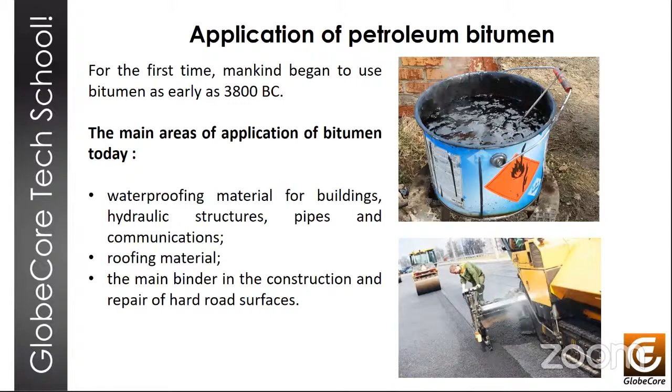Right, so under normal conditions, at normal room temperature, bitumen is a solid or very highly viscous material. It is not very usable for any application. So to use it, we must make it liquid. And we can do this in one of three ways. We might heat it to some 100, 200 degrees Celsius until it turns sufficiently liquid, and then we can apply and mix it as we wish.

Asphalt concrete mixtures prepared with this hot bitumen, as a rule, are stored, transported, and applied hot, probably with the exception of cold stored bitumen mineral mixtures, which are prepared with heating, but still stored and applied cold. We can dilute bitumen with refined oil products, such as various solvents, kerosene, diesel fuel, gasoline, etc. And that makes this bitumen or asphalt liquid.

And the third way, and the one we will be focusing on today, is emulsification. We mix bitumen with water, adding in a surfactant, also known as emulsifier. And as a result of this emulsification, we get a bitumen emulsion, which is still liquid even at ordinary room temperatures.

So when paving roads using hot and warm asphalt concrete mixtures that are prepared with hot bitumen, and that would include crushed stone mastic mixtures or hot compacted or cast mixtures, the road surface hardens and gains strength as the applied mixture cools down. And this method has both advantages and limitations. The advantages include the possibility of making asphalt concrete with high strength when using high viscosity bitumen for roads with heavy traffic.

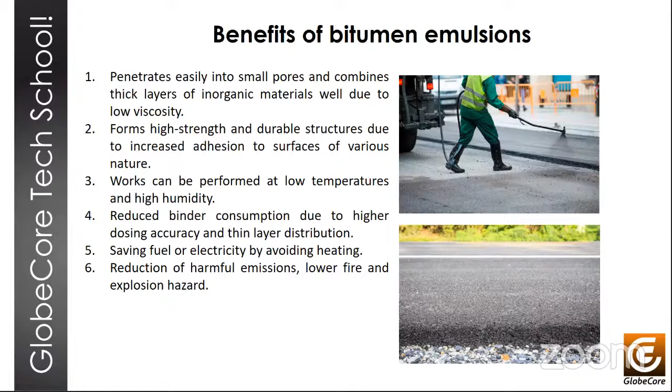So what is an emulsion? It's a dark brown liquid. It's made by dispersing bitumen droplets, particles, in water. And this dispersion is counteracted by the internal cohesion and viscosity of bitumen and by the surface tension forces, interfacial tension, which resists the formation of this new interface. While we keep mixing this mixture, it's okay. But once we stop, if we don't add special chemicals, the emulsion just breaks down into water and bitumen really quickly. So to keep the components mixed, we use a surfactant, and that surfactant prevents or slows down the separation of the phases of the emulsion.

And the way it works is the emulsifier molecule is polar. One end is compatible with bitumen particles, and the other part of the molecule is repelled by other molecules of the same emulsifier. So bitumen particles are surrounded by a force field of a kind, and they don't stick together and stay apart in the emulsion. Next slide, please.

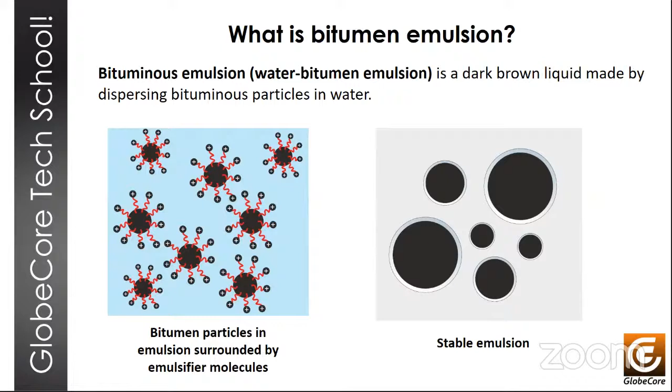Also, apart from bitumen, water, and a surfactant, emulsion contains a stabilizer. It can contain acid, various solvents, and thinners. Acid is necessary to improve the stability of the emulsion. In most cases, we'd use hydrochloric acid, orthophosphoric acid, and acetic acid. For anionic emulsions, however, we use alkalis. So same function, but different pH. Okay.

Stabilizers are used to reduce the changes in the physical and chemical properties of the emulsion during storage and use. That would be maybe calcium chloride solution, very weak, 0.05 to 0.1%. Solvents are used to create a more homogeneous system, and they are light oil fractions with a boiling point of about 140 C in the amount of maybe 0.5 to 3% of weight. And we also can use thinners, and these include various gas oils, oil fractions, etc. And there is a wide range of those.

We can use anywhere from 5 to 30% by weight. What they do is they increase the penetration of bitumen to the required parameter, to the required value. So we have a stable liquid emulsion in the end. Also very important, adhesive additives. They improve, as the name implies, the adhesive properties of the emulsion.

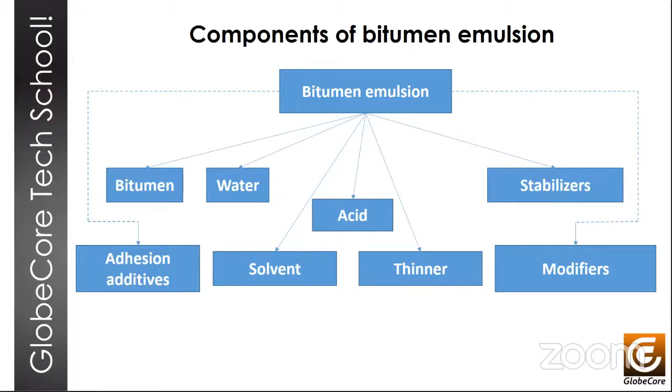So now that we have talked about what the emulsion is, let's talk about the classes of the emulsion. And depending on the type, we can have direct emulsions, and these are oil in water emulsions. There is the inverted type of emulsion, a water in oil emulsion. That's when water is the dispersed phase and is dispersed in bitumen, which becomes the dispersion medium.

And it should be noted that during the production process, both types of emulsions can be formed simultaneously, especially if we use double-purpose surfactants. And what type of emulsion will eventually turn out depends on the nature of the bitumen, the pH of the water medium, and the ratio of the volumes of the phases.

So in order for the surfactant to function as such at the oil-water interface, so to be adsorbed, we must have an affinity of the same order for both phases. And if this condition is not met, the emulsifier will move from the interface to the phase for which its affinity is greater. And typical examples of such well-balanced substances are some soaps, and their molecules have an organic tail with a strong affinity for oil and an ionized head with a significant affinity for water.

With very short tails, the affinity for water predominates and the molecule is absorbed into the water, which makes the emulsifier poorly balanced. With very long tails, the affinity for oil dominates, and the emulsifier again is poorly balanced. But with a certain average ratio of the lengths of the head and tail, there is an optimal balance and the best stabilizing effect that can be achieved.

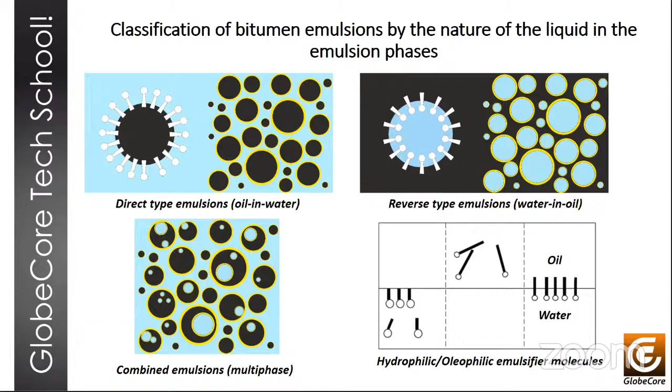So here's how emulsions are classified depending on the concentration of bitumen. Basically, low concentration emulsions contain up to 40% of bitumen, concentrated contain up to 74% bitumen, and highly concentrated go above 74% of bitumen. And currently, it's safe to say that only the first two types are used in road construction. Highly concentrated emulsions are used extremely rarely and are currently practically not produced.

But there is some promise in them for this production, primarily where it's necessary to transport emulsions over long distances. So there are benefits to that. Next slide, please.

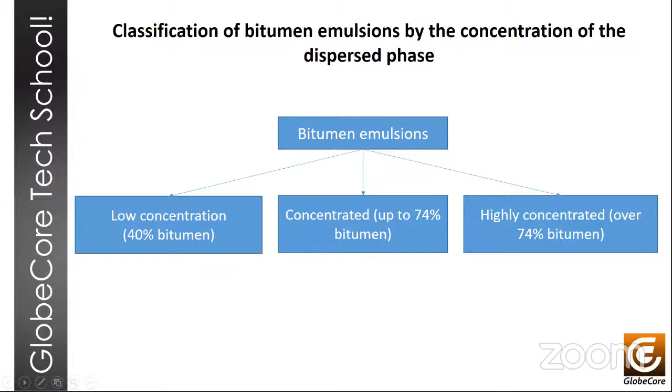And there are classes of emulsions depending on the emulsifier. So this can be anionic with the anionic surfactant, or cationic, with cationic surfactants used for those. There are amphoteric emulsions with double-purpose emulsifiers, compounds that ionize and act differently in water solutions depending on the pH of the medium. They exhibit the properties of cationic surfactants in acidic solutions and anionic surfactants in alkaline solutions. Then there are non-ionic ones that have surface active properties but don't dissociate into ions in water solutions.

And there are emulsions with solid emulsifiers. Okay, so emulsions of the inverse type, depending on the nature of the emulsifiers, are usually not separated into classes traditionally, but now when it became possible to have a large selection of emulsifiers, we can divide them into some subcategories. There are surfactant emulsions, solid emulsifier emulsions, and emulsions based on non-ionic emulsifiers.

And this type of inverse emulsion is still under development, but again, has its promises, especially in the case of using an emulsifier that's sensitive to temperature changes during the preparation or application of such emulsion. Next slide, please.

Okay, so in road construction practice, the most common emulsions are of direct type. They are primarily anionic or cationic class. Therefore, the classification of these emulsions in the United States is based on the rate of mixture formation, of setting based on this emulsion, and the rate of breaking of the emulsion. So how soon the bitumen is released from the emulsion and achieves its original properties and forms a continuous film. And there are rapid set emulsions, medium set, slow set, and quick set emulsions.

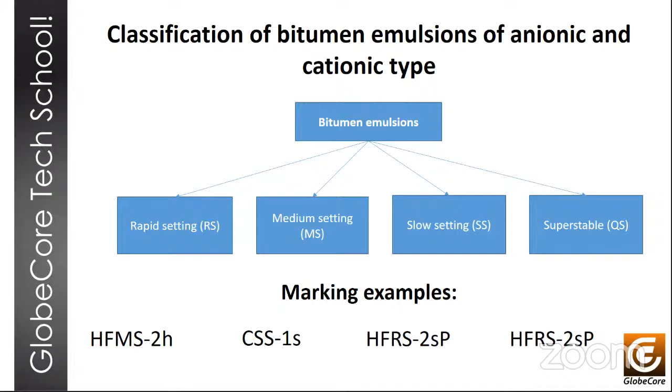So bitumen emulsions pretty much perform two main functions. The binding function is the use of an emulsion to bind mineral materials and their particles together, which is a prerequisite for the production of asphalt mixtures, such as emulsion mineral or black crushed stone or cold mixes and what have you. The protective function is to protect materials and surfaces against the effects of aggressive media or the elements, so, water, salts, etc.

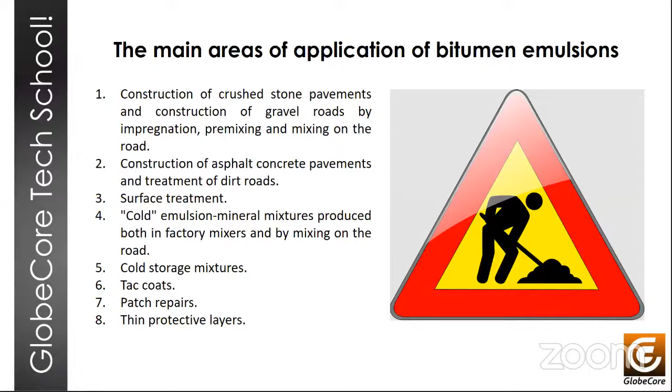Bitumen emulsions can also be used for quite a wide range of road construction works. They can be used for surface treatment, for cold storage mixes, for creation of traction layers, tack layers, pothole repairs, and thin film protective layers, etc. Okay. Next slide, please.

So first, let's briefly touch on the subject of primer coats. Priming means the application of an emulsion by spraying it in the form of a thin layer, which ensures reliable adhesion of the asphalt mixture to the underlying base. For most types of pavement, be it concrete or anything else, the creation of a binding layer is not just desirable, it's also necessary.

So one of the types of priming is the application of the so-called initial coating, when a slow emulsion with a bitumen content of 55 to 60% is sprayed onto a granular base to prepare it for the application of an asphalt concrete mix. Next slide, please.

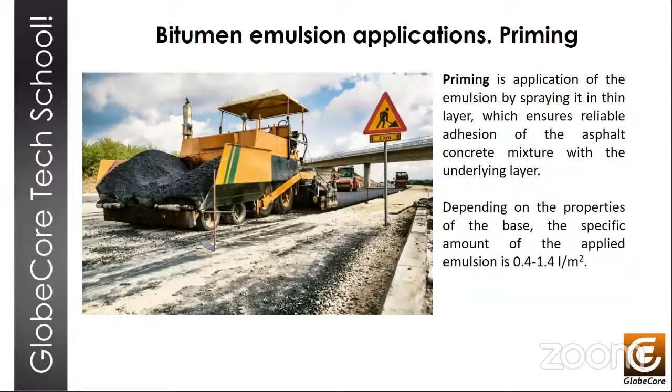Surface treatment is performed on new asphalt concrete and various types of black and cement concrete pavements, as well as on used pavements, to ensure the necessary adhesion and traction between the wheels of vehicles and the pavement surface, and also to increase the service life of the pavement. So the layer created by surface treatment serves to give the coating certain roughness and water resistance, wear resistance and strength as well, and density.

So we're talking here about both an inexpensive single treatment of secondary road surface and the creation of wear resistant surfaces on large major roads with relatively high traffic loads. And it's important to know the strength of the base is important to the durability of the surface that we treat. Okay. Next slide, please.

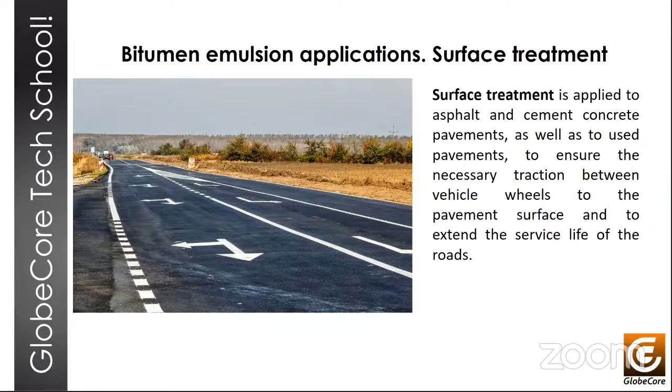Okay, there's crushed stone impregnation. That means the construction of layers, bases, and coatings and pavements by multiple scattering of crushed stone of various fractions, compaction of that stone material, and its permeation with emulsion. Usually done twice, with slow breaking emulsion that contains 50 to 65% bitumen on average.

There is the patch repairs, and the use of bitumen emulsion does greatly simplify the repair process, and it allows operations to continue well into late autumn and start early in spring with air temperatures just 5 degrees above 0 Celsius. So when using emulsions, it's possible to apply them on wet materials because cationic bitumen emulsions ensure pretty fast formation of a binder film and high adhesion of this film to the surface of most aggregates, even wet, and generally rather good quality of the repair works. Next slide, please.

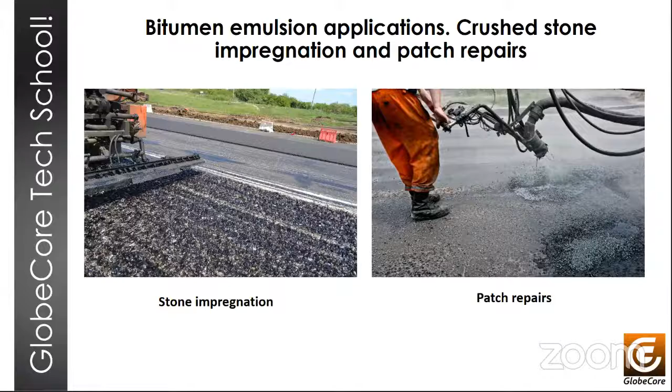And there are other technologies as well. There's slurry seal, microsurfacing, Multimac, and cold recycling. Slurry seal is a method of applying thin layers over existing pavement. This cold mixture consists of dense mineral material with a filler, usually Portland cement. It's mixed to a uniform consistency with bitumen emulsion and water. And after the so-called setting time, the surface becomes impermeable to water.

The coefficient of friction is improved for vehicles, and the old coating is protected from water, oxidation, and further breakup. And with the help of slurry seal, rutting and longitudinal deformations of the profile can be compensated to a degree. Since there are practically no voids in this hardened mass, it resists squeezing very well under vehicle wheels. And after coating is complete, traffic can resume after about 1 to 4 hours. Okay.

Microsurfacing emerged as a further development of the slurry seal method. It's a method of creating a rather thick and durable coating for the surface. Microsurfacing can be applied in 2 layers of 25 to 30 millimeters in thickness, and in some cases, the total thickness actually reaches 75 millimeters. With this technology, larger stone material is used, and it's bound even more strongly than in slurry seal. The coating can withstand significant physical loads without deformation. And to further increase the shear stability, latex is used in this process. Next slide, please.

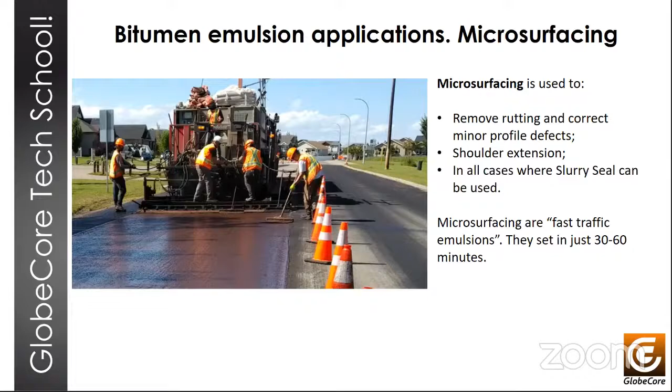All right. Multimac. It's a thin layer coating that has the function of a protective layer or layers. It cements the damaged base, fills all cracks and voids with a bitumen mineral mixture, and it evens out any deformations in the pavement. This mixture is prepared and distributed by a special machine that is equipped with a very precise digital computerized system for portioning of components. Multimac does not require any special sealing, so traffic is possible within 20 or 40 minutes after the work is done.

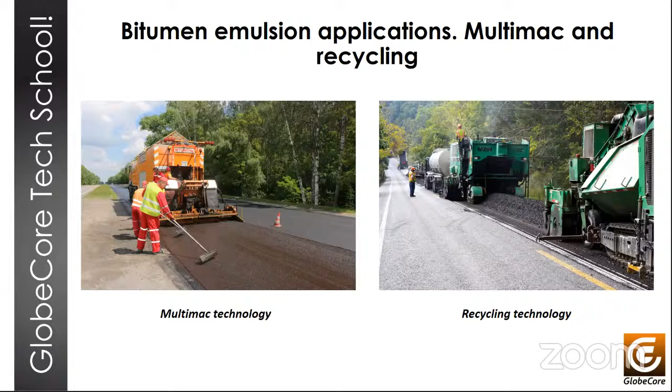Recycling, or cold recycling, is a technology of strengthening soils, stone materials, and asphalt granulates that are obtained as a result of crushing asphalt scrap, with various binders, by cutting and mixing it directly on the road. Next slide, please.

Right, so sealing cracks in the pavement can also be done using bitumen emulsions. The cracks are filled with an emulsion mixed with fine-grained sand, leaving a few millimeters to the surface. And after solidification, the remaining volume is filled in with straight unmixed emulsion without the sand. And then sand is applied over the top of that to protect this material from being carried away by vehicles

and wheels. And bitumen emulsion can also be used to reinforce slopes, reinforce sandy surfaces to prevent dust formation, and remove dust from unreinforced materials and dirt roads. And in many cases, emulsions can also be used for waterproofing. Okay. Next slide, please.

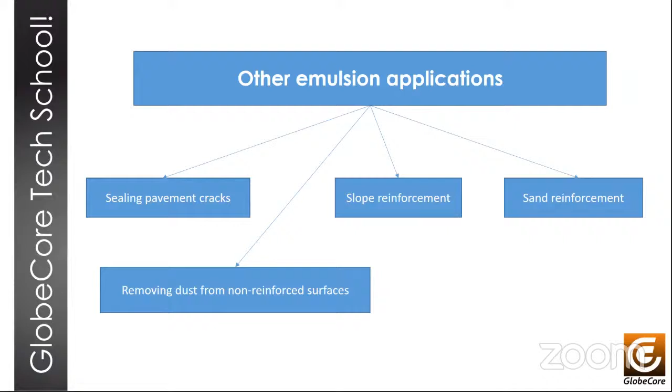So now that we know that emulsions are good, let's talk about how to make them. Bitumen emulsions are usually made using a colloid mill, but they can also be prepared using other dispersing devices. In a mill, an emulsion is produced by passing a mixture of hot bitumen and a water phase, a solution, between a rotor and a stator of the mill. The rotor and the stator both have slots or teeth that create a very turbulent flow and very high shear forces. And for the preparation of bitumen emulsion, either batch or continuous production plants can be used.

Batch production process consists of 2 stages. The first would be the preparation of what we call a water phase, also known as soap phase sometimes, and the actual production of emulsion. The water phase is prepared in a tank with heated water, emulsifier, acid or alkali, and other additives. And the solution is mixed. And then at the stage of actual emulsion production, bitumen and this water phase are mixed in a colloid mill

in a certain proportion. So if we need to add a solvent to the mix, then we need a bitumen portioning tank. But the solvent can be dosed and injected into the bitumen stream directly and continuously as well. So in a batch unit, there are only a few material streams involved in the actual production process, which allows manual control. And the exact dosage of the various components plays a very important role in ensuring the quality of this emulsion.

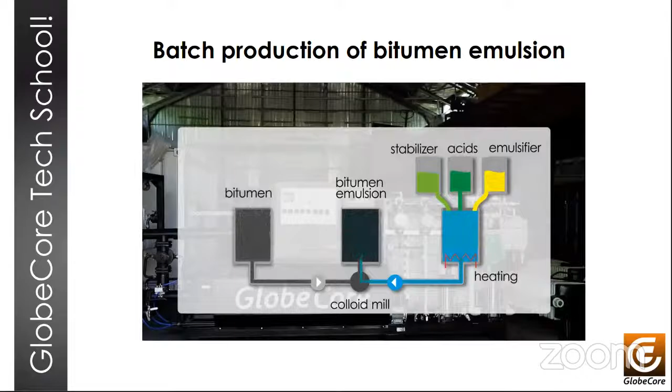Right, there is also the continuous production process. Basically water heating and portioning of all the materials are done continuously using separate portioning and dosing pumps for each of the material streams, and batch tanks are not used. Instead, a water phase feed system is designed to provide a sufficient time interval for the reaction between the chemical additives to neutralize and dissolve until the water phase is combined with bitumen. And this process requires the use of automated control with flow meters for the dosage of all product streams, with the exception of acid. The supply of acid is controlled based on the pH of the water phase that is measured.

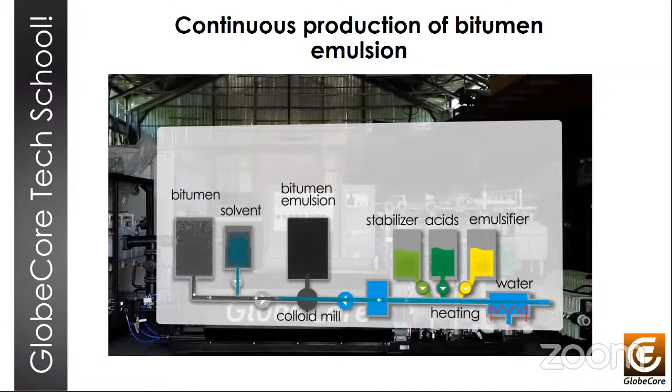Now, when making an emulsion, it's possible to use various polymer modifiers such as latex, SBS, and other additives. And in this case, it becomes necessary to equip the plant with additional components, as well as to implement appropriate solutions in terms of technology process. Latex, for example, is sensitive to certain factors that can cause it to break, and it clogs pumps and pipelines.

For SBS polymers, it's usually necessary for the emulsion output to be at a temperature above the boiling point of water, which in turn requires certain overpressure, and then the resulting product is cooled before it's fed into the storage tank under normal atmospheric pressure. Okay, next slide, please.

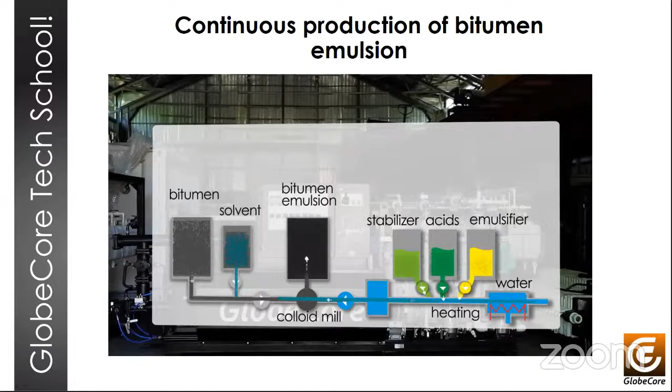So today we're going to show you how this works in practice by giving you a glimpse of the two GlobeCore machines, one that makes 2 cubic meters of emulsion an hour, and the other makes 8 cubic meters of emulsion an hour. And when we're done with this glorious PowerPoint presentation, we're actually going to take you to one of our production facilities and show you 2 of these plants live. Meaning they're not in operation, but they're finished plants, and we can demonstrate the plants and how they work. Okay. Right. So here you can see our GlobeCore plants in the next slide. Next slide now.

A big table with specifications. I guess some of the things to pay particular attention to is the dimensions. The dimensions are, as you can see, quite compact. I believe they're all in metric, but so about 2 meters in length. It's about 6 feet in length or so, just a little over 6 feet in width, and a little less than 6 feet in height for the smaller one. So yeah, there you go. So one is 2 to 3, and the other one is 8 cubic meters of emulsion per hour production.

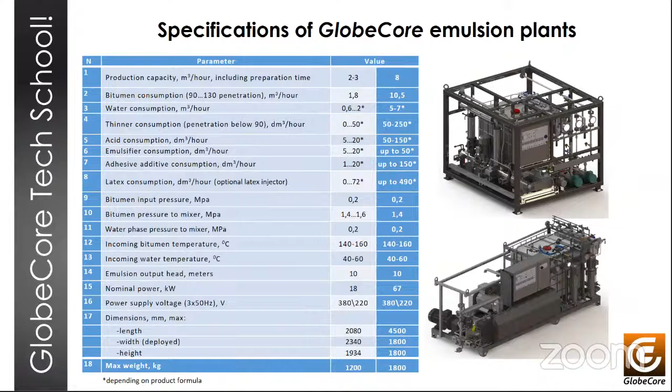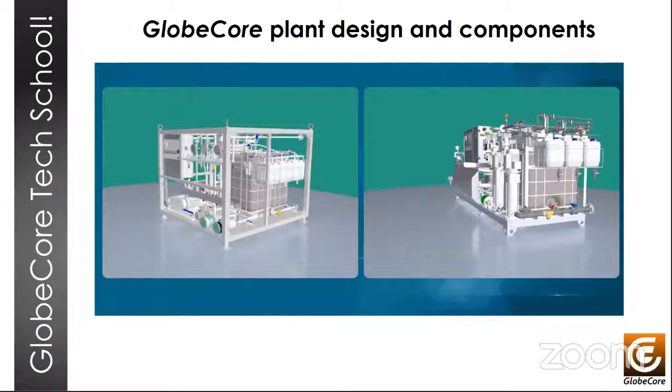Okay. Next slide, please. Right. So both plants are semi-automatic. They consist of several independent units that are connected by pipelines that are mounted on the same frame. And the plants can be divided into subsections. Basically, we have an emulsion preparation section and a water phase preparation section. And there's also the control system. Okay, next slide, please.

So, okay, the emulsion preparation section is basically a 3-stage mixer with pipes, valves. There is a bitumen pump, and there is, of course, a colloid mill. The components are equipped with heating jackets that are connected to an oil heating system, and this ensures that the hot oil passes through the entire system and maintains the temperature that is required for the emulsification process and handling of bitumen.

And the water phase preparation section consists of a blending tank that is connected to all the pipes with all the indicators for the visual control of the flow. There are control valves and regulation valves, certain instruments, and all of this stuff is mounted on the same frame. So it's basically a self-contained skid, same frame as the emulsion preparation unit.

And of course, the machines are equipped with all the necessary temperature and pressure sensors. There are several points where we take temperature measurements. It's water supply, blend supply, a bitumen feed to the plant, incoming bitumen, bitumen stream into the mixers, and the emulsion output. And we also measure pressure at the inlet, after the bitumen pump, and right before the mill.

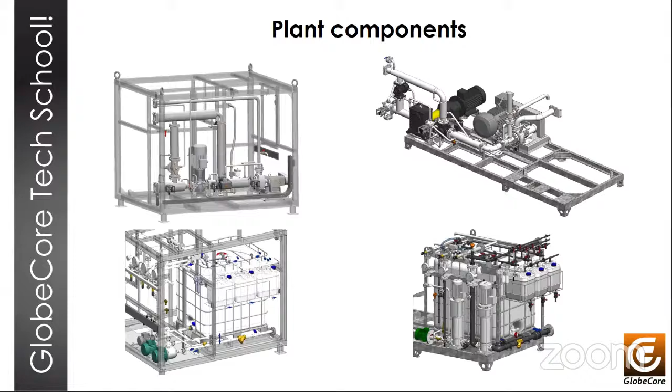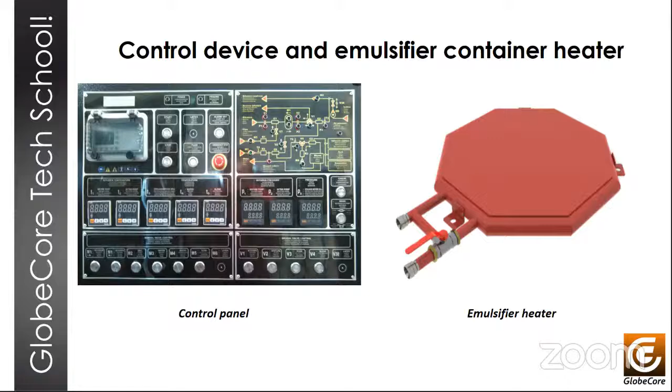These plants allow production of all types of emulsions. It can be cationic fast, medium, or slow set emulsions, and there can be anionic emulsions of the same types. That includes the H subtype, the emulsion based on hard bitumen. And all emulsions that are made with GlobeCore units perfectly comply with the ASTM D2397-98 and D977-98 standards for cationic and anionic emulsions, respectively. Okay. So, okay, next slide.

So, due to its design, the hydrodynamic mixer provides nearly instant mixing or even blending of the components that come into it due to the kinetic energy of the bitumen stream and the speed of the flow. And so this component can be made small because of this. The same principle is used for mixing the components of the water phase of bitumen with the solvent, and then the bitumen phase and the water phase.

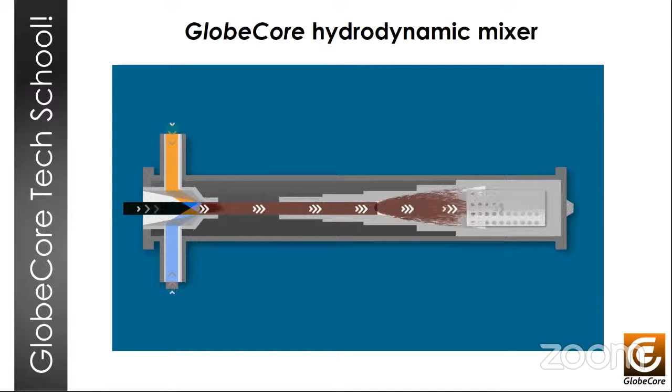Right. So during the circulation of water in the tank, a pump draws in the necessary components through the mixer. The components are supplied one after another, opening the valves of the measuring containers to prepare a water solution of the emulsifier surfactant. So in our plant, we prepare a concentrated emulsifier solution, which instantly forms a water phase with specified characteristics, mixing in the required proportions with water that is heated to the process temperature.

The water phase is made immediately before mixing with the bitumen phase, and it goes from the mixer of the water phase to the mixer of the bitumen emulsion directly. So the advantages of this method are precise portioning of components and precise adjustment of these concentrations. There is a significant reduction in mixing time and the elimination of any mixing tanks for homogenizing the product. Therefore, we're able to design a fairly small size plant.

So the supply of each component can be constantly adjusted during mixing to ensure the output of the finished product complies with the required parameters and the product formula. Another advantage of this process lies in the fact that the plants can work longer using one batch of water phase without the need to use large containers for blending, because the concentrate of the water phase is diluted by as much as 5 times before entering the emulsion mixer with just regular water.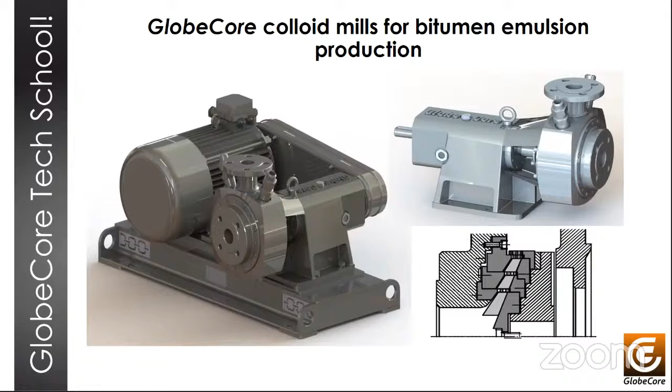Right, so this is the process diagram for the production of bitumen emulsion. In addition to the plant in position 10, this process should also include a bitumen boiler, a bitumen pump, a heating station for oil with a circulation pump to heat the plant, a water tank, a thinner tank, an emulsion reservoir, a tank for the acid, an emulsion pump, and a compressor that is used for controlling the pneumatically operated valves. Next slide, please.

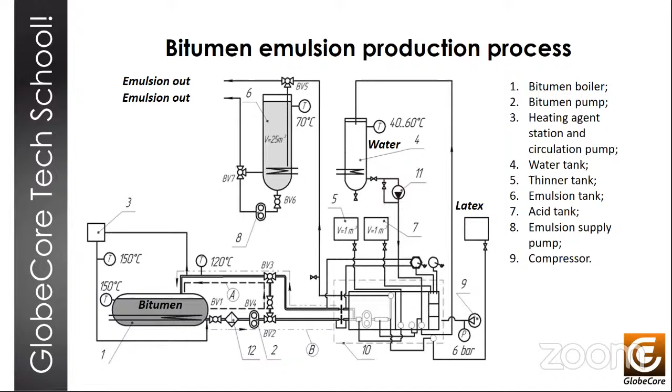So let's look at the operation of this machine. Before everything starts, everything is warmed up to 120 degrees Celsius with the oil of the heating system that's provided by the heating station. All right. In the bitumen boiler, bitumen is heated to 140 to 160 degrees Celsius.

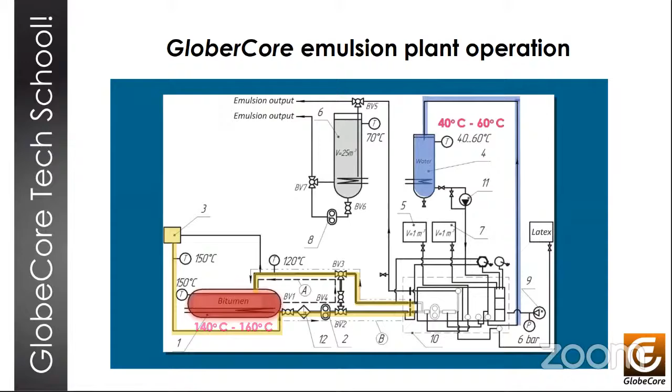In the water tank, water is heated to 40 to 60 degrees Celsius and is supplied to the plant through an inlet filter. The water pump is turned on, and the water goes through the flow meter, a control valve, and it's circulated to stabilize the temperature in the water heating tank. Then another valve opens and supplies maybe 800 to 900 liters of water into the tank in position 1, and the actual amount depends on the product formula.

Then acid is fed into the supply tank in position 2 from an external container, usually by gravity. Then emulsifier is pumped from a barrel by hand pump into the tank in position 3, and if necessary, that emulsifier can be heated.

All right, then the adhesive additive is pumped also from an external barrel by hand pump into the tank in position 4. Then the blending pump M4 is turned on, and water circulates through the C5 injection mixer, this hydrodynamic mixer that I've shown you a few minutes before, and a vacuum is generated in the injection chamber of the C5 mixer. And by opening valves V17, V18, and V19, the operator, according to the formula of the product, dissolves all components in the water. And after 30 minutes of operation of the M4 pump, the blend in this tank is ready.

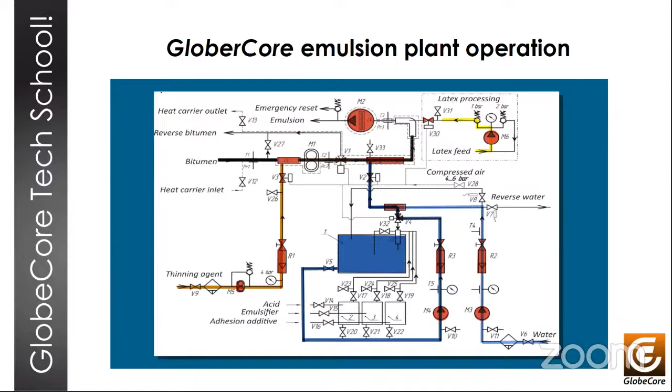Next slide, please. Okay, now that I've briefly described the principle of operation, I can maybe summarize the main benefits of these plants. First, it's the fact that the plants can produce emulsions of all types. It can be cationic with various set rates, anionic, modified emulsions, whatever is necessary. The quality of the product is rather high. Maintenance is simplified because there is no or less mechanical mixing than in traditional technologies. Basically, most of the mixing is done in the hydrodynamic mixers, which don't have any moving rotating parts that are subject to wear. The equipment is small, so smaller equipment footprint is always good.

The formula of the product can be adjusted on the fly, very easy to adjust, very flexible. Also high precision of dosage of ingredients. The machine can operate for a long time on one batch of water phase, because the water phase is prepared as a concentrate and then diluted as necessary just before the emulsification process with bitumen. You know, this equipment has been around for a few decades, so also good quality and very customizable production rates. So whatever the client requires, maybe 1 cubic meter an hour or 20 cubic meters an hour of emulsion, that can all be arranged.

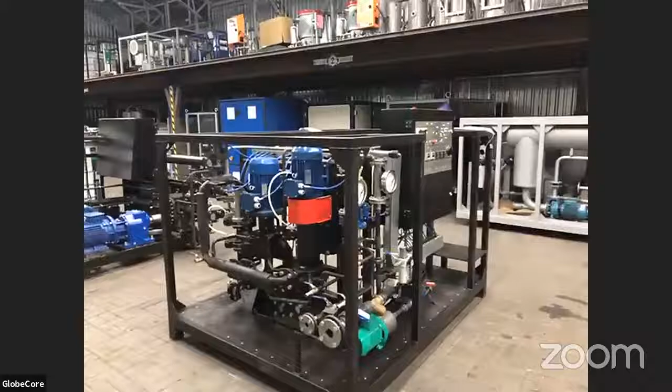All right, let me present to you our engineer Stanislav, and he's here to present to you two of the GlobeCore machines that I mentioned during this presentation. The first one, closer to us, is the 2 cubic meter an hour machine, and the other one, further away, the larger one, is an 8 cubic meter an hour machine. So I will let Stas continue.

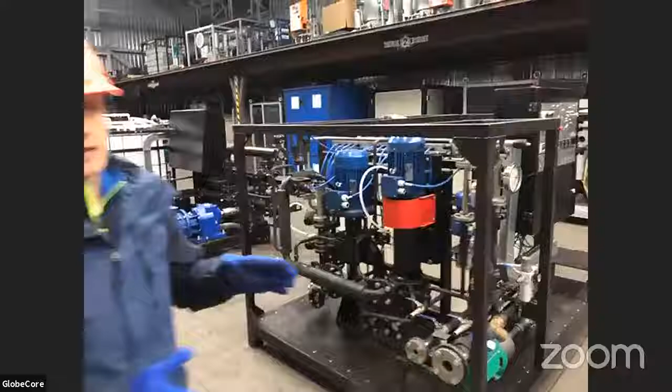So these are batch machines. As I mentioned during the presentation, there are two stages to this process. First is the production of water phase, and the second is emulsification of bitumen proper.

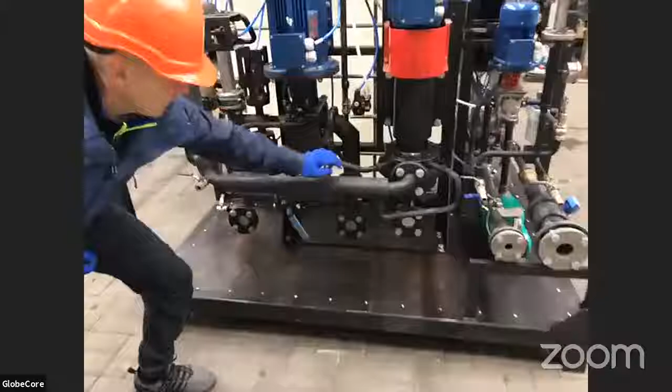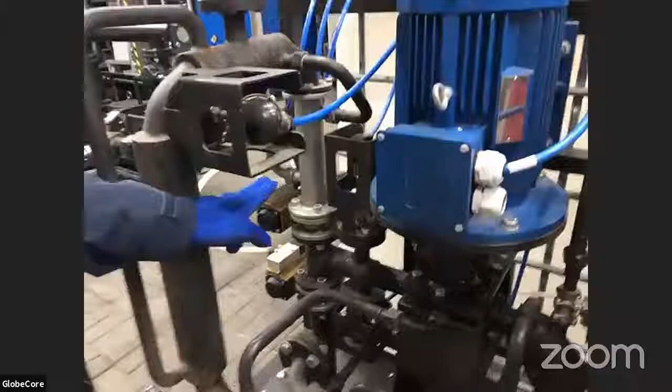Okay, so this side of the machine is the bitumen part, and we're going to show you briefly how it works. This is the input of the bitumen to the bitumen line. This is a supply pump for bitumen. And this is the hydrodynamic mixer that bitumen goes to. At the same time, water phase is supplied to this mixer. And then this product goes for homogenization in the colloid mill. And from here we get the output.

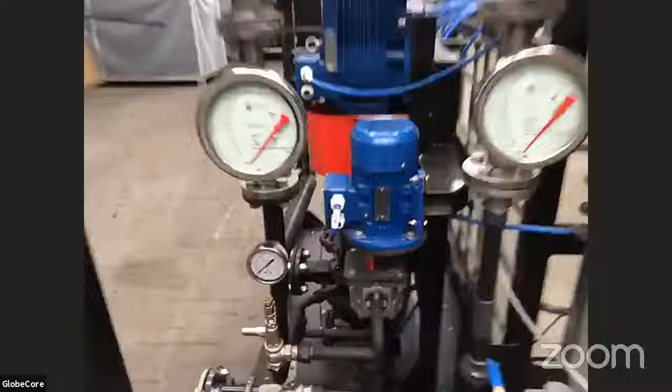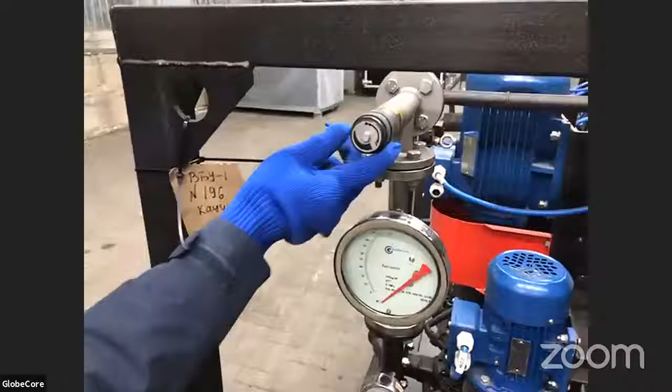And of course, for such emulsion, we need additional components, specifically in this case, thinner. So this is the first thing that is added to bitumen at this point, and if we follow this line, we can see this gear pump here that supplies the thinner. The control of the formula and the recipe is done with this manual regulation valve. And we can see the flow of the thinner here on this flow meter for kerosene.

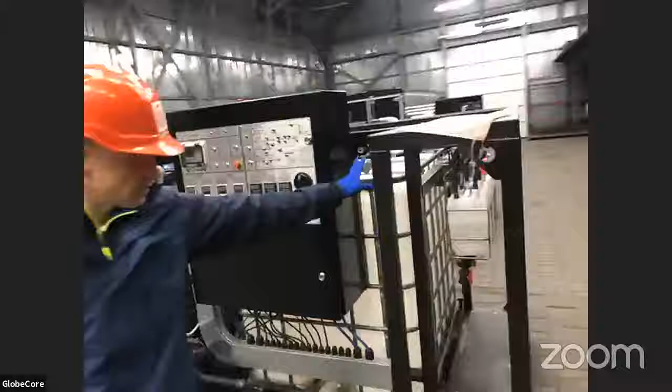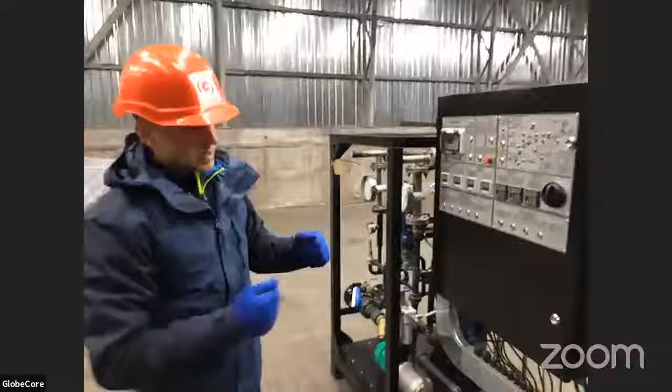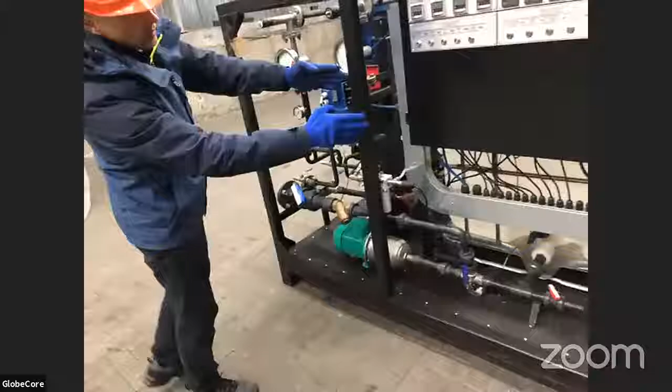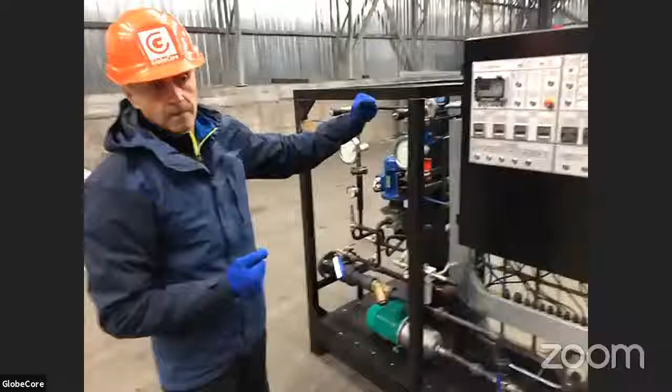Anyway, water phase is prepared first, so we're going to demonstrate the water phase section now on this side of the machine. The operation of the section is facilitated by this pump. So this pump circulates water through an external tank and supplies it to the blending tank of the machine. So when this blend is ready, the same pump supplies the water phase into the bitumen line.

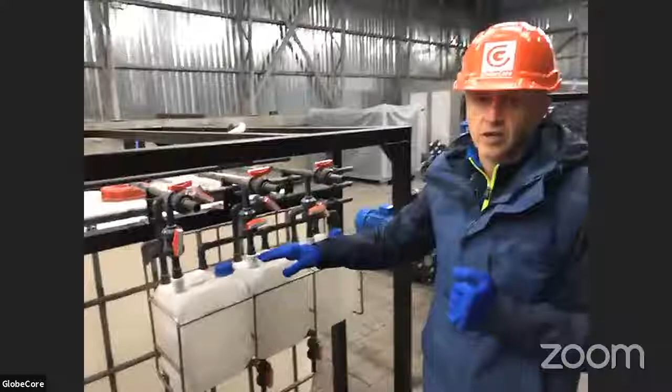And the water phase section has these extra containers for the other components. It can be acid or alkali or emulsifier and stabilizer. But this is entirely customizable depending on specific customer needs and specific product formula. This arrangement can be changed. So the ingredients are supplied by opening these manual valves. And they all go into the same hydrodynamic mixer as the one installed in the bitumen line.

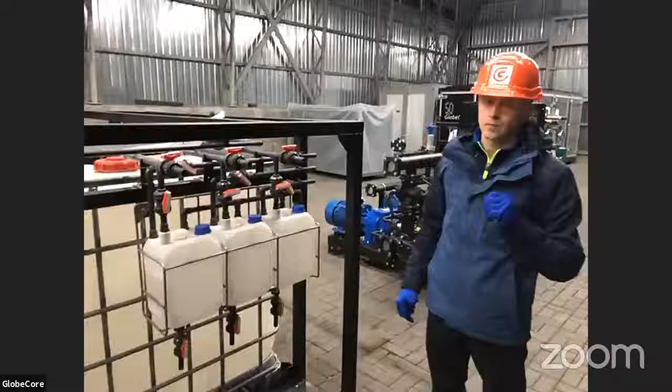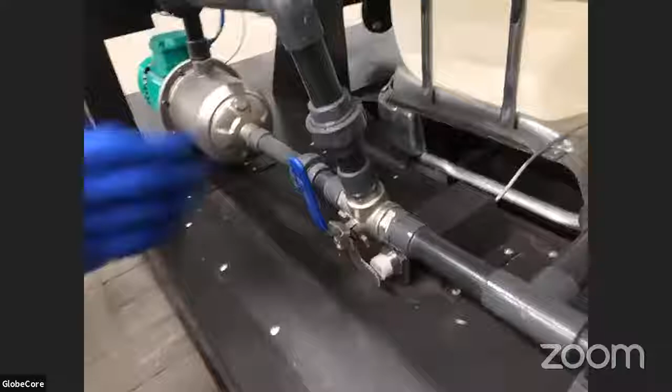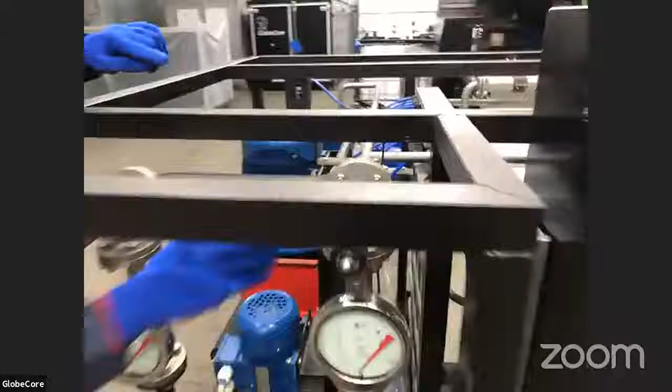We can regulate the portioning of the components with a scale that's installed in these little tanks. And when the blend is ready, there is this one manual valve right here. So we close this valve, and this pump begins supplying the blend into the bitumen section. All ingredients are supplied into this hydrodynamic mixer.

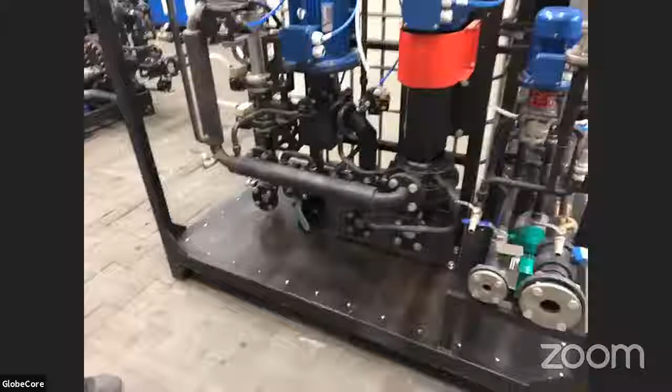And from the mixer, the emulsion goes into the mill for homogenization and then to the output. And that's when we get the finished product.

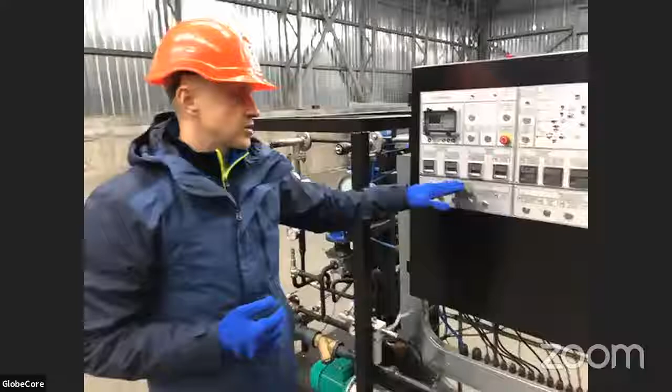You can see here the temperature sensor and the pressure sensors.

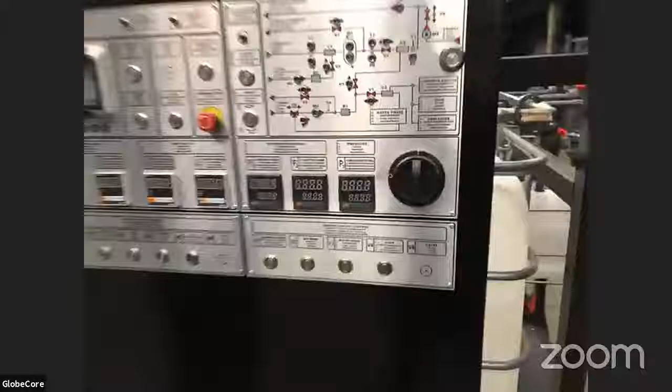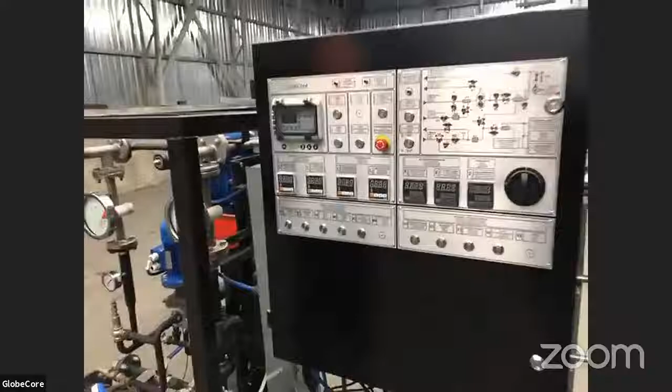Of course, if anything bad happens during the process, there is an emergency stop button. You mash it and everything stops.

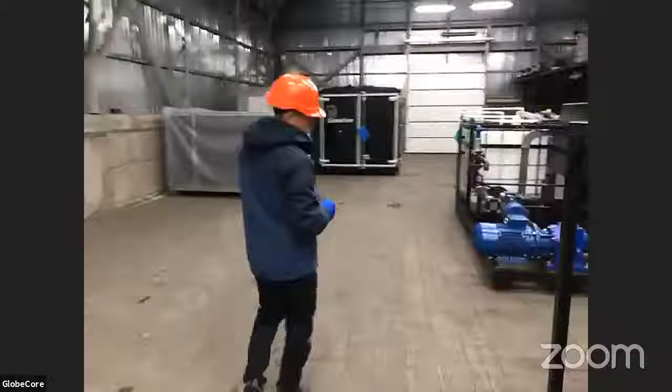Now, if we can follow Stanislav to the larger machine.

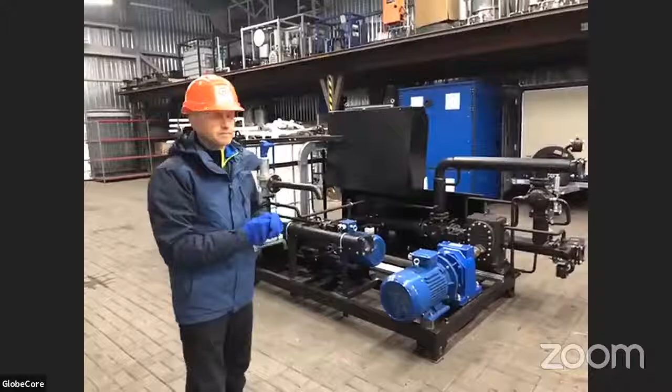So yeah, this machine is in the very late stages of production. So some of these smaller parts are not yet installed, but it will be sufficient to demonstrate the principle anyway.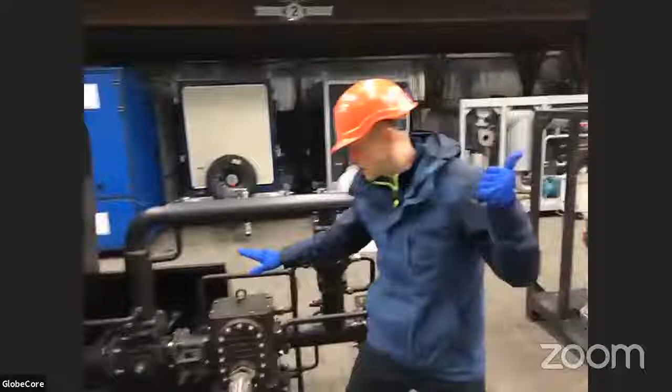The basic makeup of the machine is the same. This is the bitumen supply pump. It's the hydrodynamic mixer.

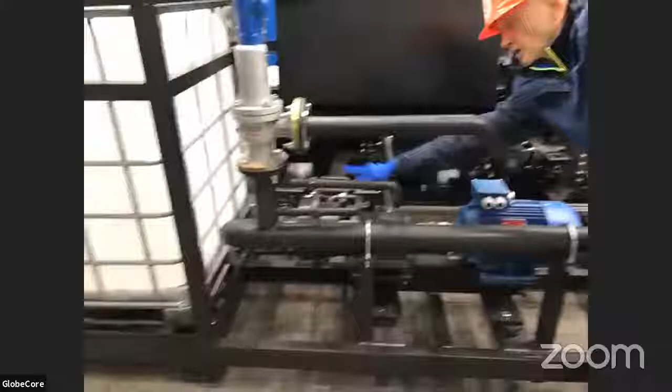And it all goes along with bitumen to the colloid mill for homogenization.

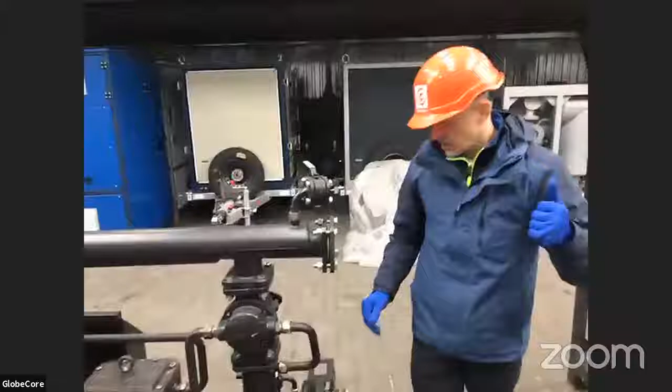Here we also have a thinner supply through this valve.

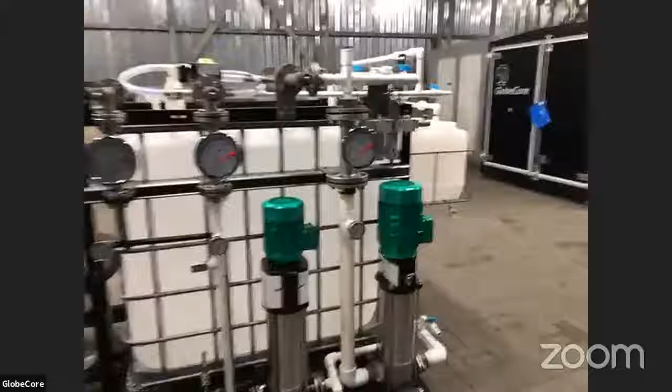And there is a slight difference from this smaller machine because for water phase, here we have two pumps instead of one.

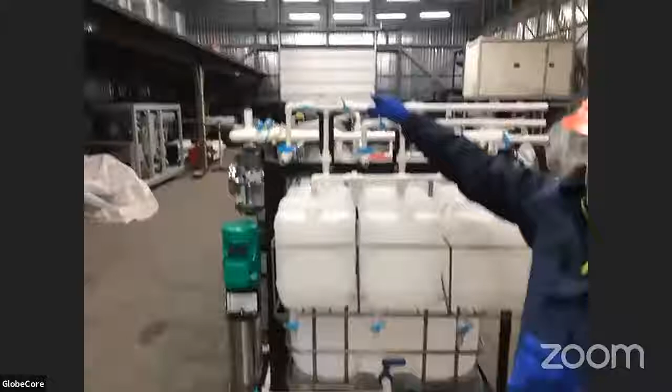Again, they're supplied by opening these manual valves and they go into the same hydrodynamic mixer.

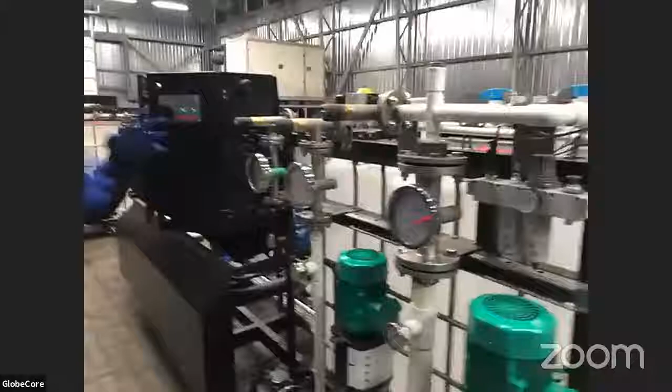So when the system's running, the 2 pumps operate together. They're operated automatically, and they supply water from the external tank and the concentrated blend into the line.

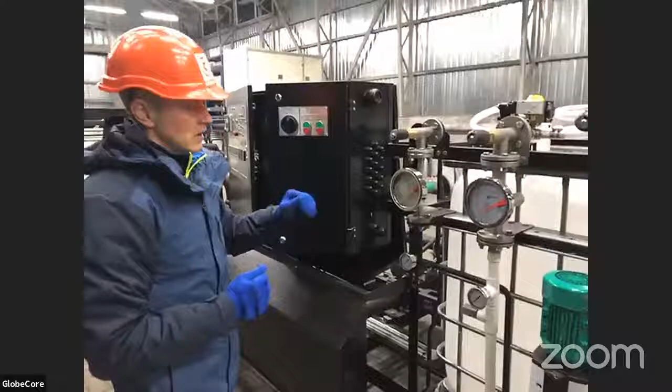And this machine as well is equipped with manual adjustment valves that allow us to precisely portion the components for the formula.

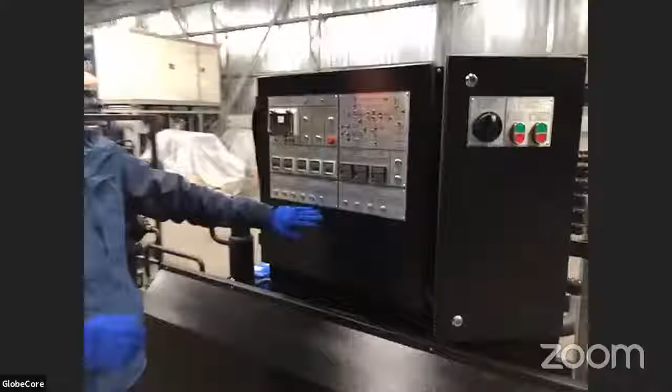And the same as the previous machine, we have here the same temperature and pressure sensors that are necessary for control of the process.

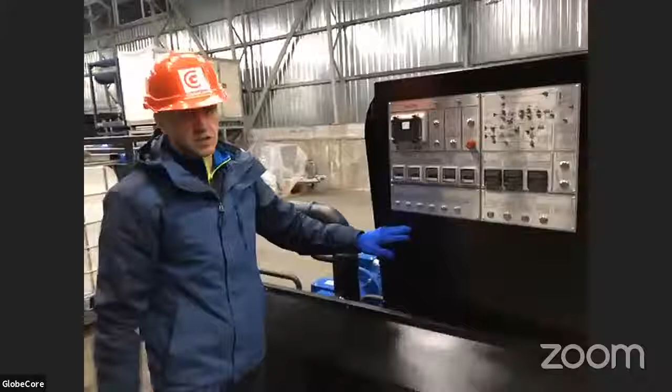Also, there is the emergency stop button, and yeah, that's pretty much it.